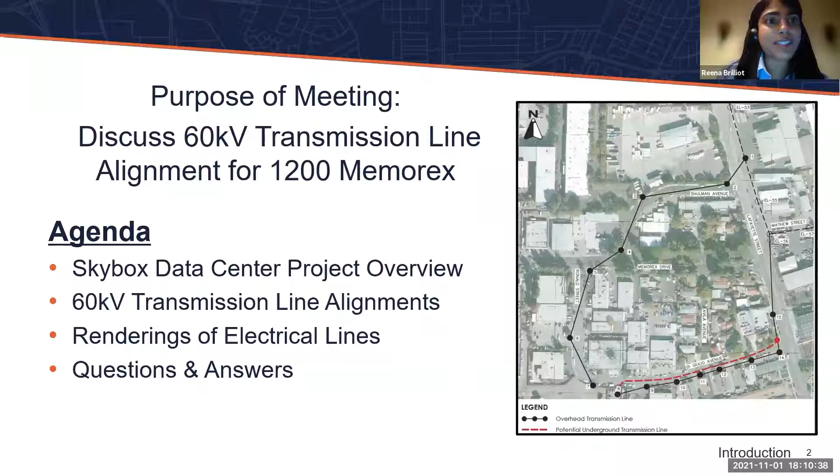So I'm going to hand over this next part of the presentation to Rob Morris, who's the Chief Executive Officer for Skybox. He's going to be presenting the project and providing that really for everyone as context for what we're going to be talking about, which is the transmission line extension options. So Rob, if you are able to speak, we will move the slides over for you.

Great. Thank you, Reena. Good evening. My name is Rob Morris, and as Reena said, I'm the CEO of Skybox, which is redeveloping the former Memorex manufacturing campus and headquarters at 1200 to 1310 Memorex Drive.

This facility is on 9 acres and consists of 472,000 square feet of data center, as well as 87,520 square feet of Class A office space. As Reena discussed, this project does require a new 60 kV service from Silicon Valley Power. Joseph, would you mind advancing to the next slide?

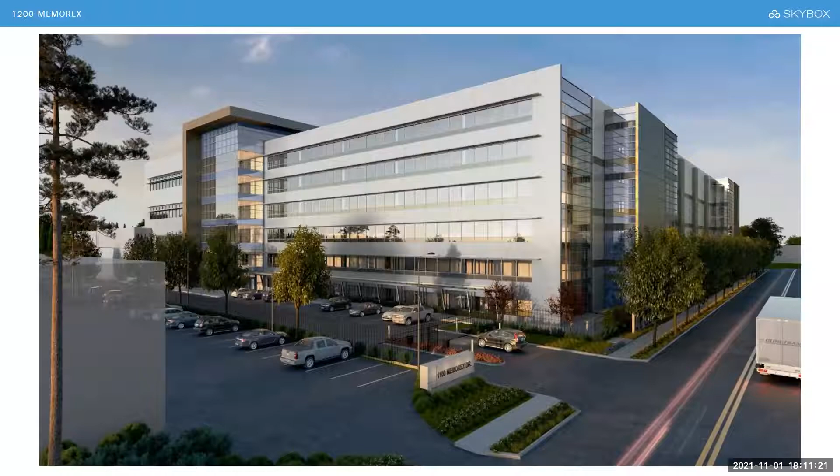Great. And you can actually, so there's the site plan there. You can see the layout. Joseph, would you mind going to the next one?

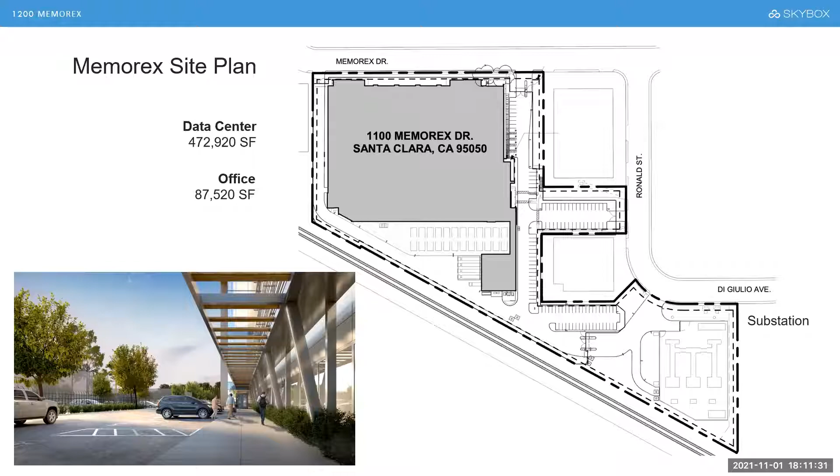We have been working with Silicon Valley Power and the City of Santa Clara staff over the last 3.5 years to carefully design the redevelopment of this existing industrial complex into a beautiful new office and data center that will be a great addition and architectural enhancement to the city. Our company has a long history of building and operating within industrial districts and adjacent to residential areas. Our office and data center buildings bring incredible improvements to community safety compared to its current industrial users.

This campus will be staffed with 24/7 security, watching day and night, and also providing dramatic reduction in existing traffic and parking requirements for the existing industrial uses. We are proud to be great neighbors in each and every one of the communities we serve, and we look forward to continuing that tradition and company culture here in Santa Clara.

With that, I would like to pass the presentation to Alan Corritore with Silicon Valley Power to discuss the considerations for electrical services this evening.

Hi, this is Alan Corritore with Silicon Valley Power. I'm going to talk to you about how we're going to provide service to this property, and go into a little detail about the alignment. I'll give you some options on what we looked at in terms of the overhead alignment and a partial underground option, show you some visual site renderings of the different alignments, and then the city staff recommendation specific to the transmission line.

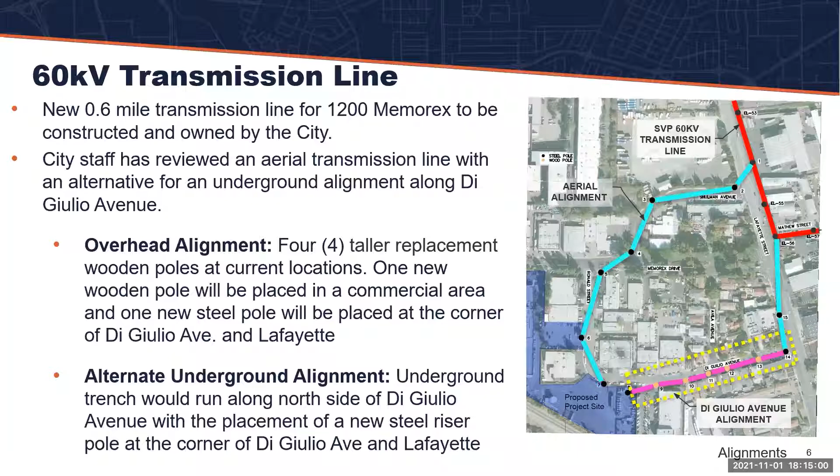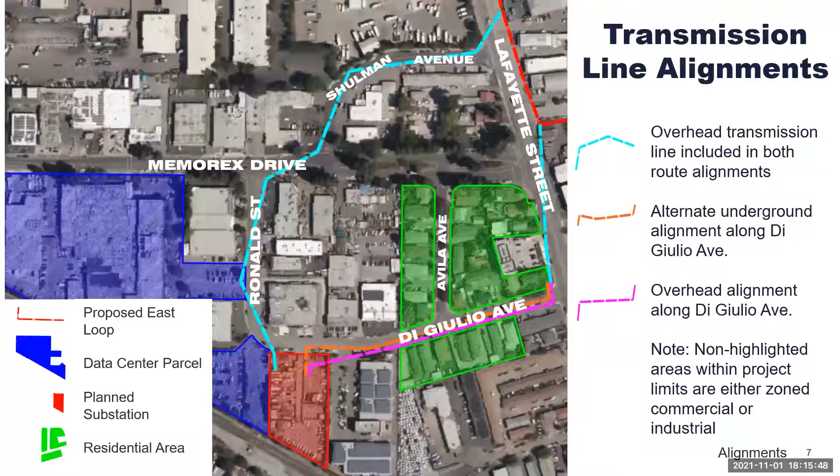I did want to highlight the residential areas within this alignment, where we looked at the overhead option and also the underground option, strictly on Di Giulio Avenue. The other parts and parcels here are either commercial or industrial uses.

So let me talk a little bit about the overhead alignment. The replacement wood poles would change in height from the existing locations from about 38 feet to about 20 feet higher, 57 feet in height. The pole diameters of the wooden poles would also increase. Typically they're out there at 12 inches, and we would see these poles increasing to 18 to 21 inches in diameter. All the existing distribution and communication lines currently on the pole would be transferred to the new poles, and no new easements would be required on the residential properties.

As we are looking to do this alignment to serve the development, the aerial alignment here doesn't require any additional easements. The construction of an overhead alignment is pretty straightforward, about 6 to 8 weeks over a 4-month period of time.

The question comes up, why over 4 months? Typically a new pole installation would be installed adjacent to or right in the same location as the current pole, and that takes about 3 days, with some localized parking impacts associated with that installation. So you would go down the street and every 3 days put in a new pole, and then later come and put in the wires, either replacement or new. Then the communication companies and others, what we call pole attachers, would come and relocate their lines to the new poles.

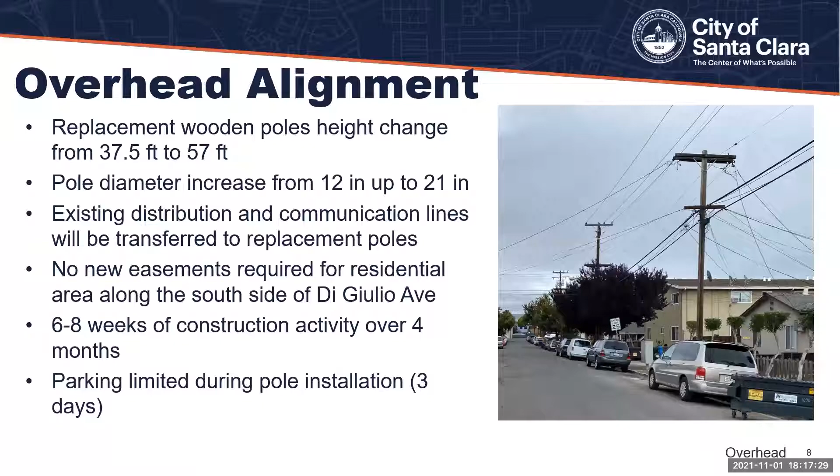So this is truly an aerial view, looking easterly on Di Giulio. I'm going to work from my right to left on this slide.

On the right-hand side would be the steel pole, about 4 feet in diameter, 65 maybe 70 feet tall, transitioning to wood poles as it goes easterly down Di Giulio. The one new commercial pole is nearest to the site, and then we would have 4 sequenced wood poles that would replace the existing poles that are already there.

As we go further down the street on the corner of Di Giulio and Lafayette, there would be a new steel pole on that commercial property, and then the alignment of the transmission line goes northerly on Lafayette.

I'll give you some more information on the coloring so it gives you some idea what's going on here. The yellow would be what we call the 60 kV lines, the new services on the taller sections of the new poles. The light blue or cyan colors are the existing electrical services currently on those poles. So that gives you a real good view of what that would look like. These are again on the existing alignment of the distribution system.

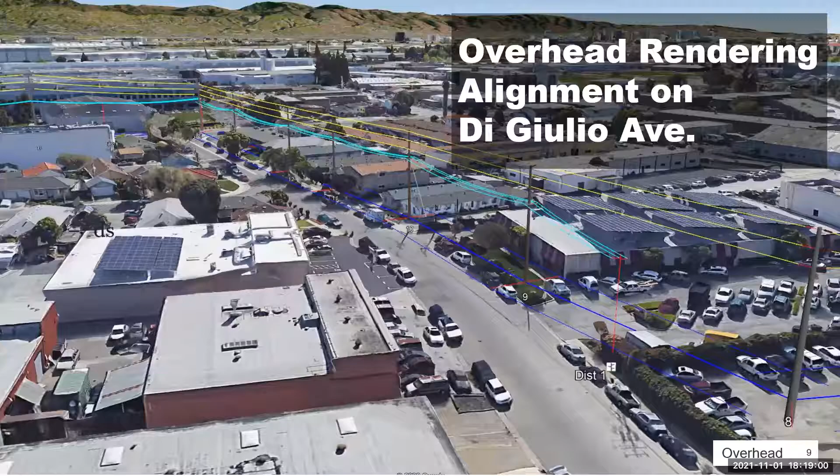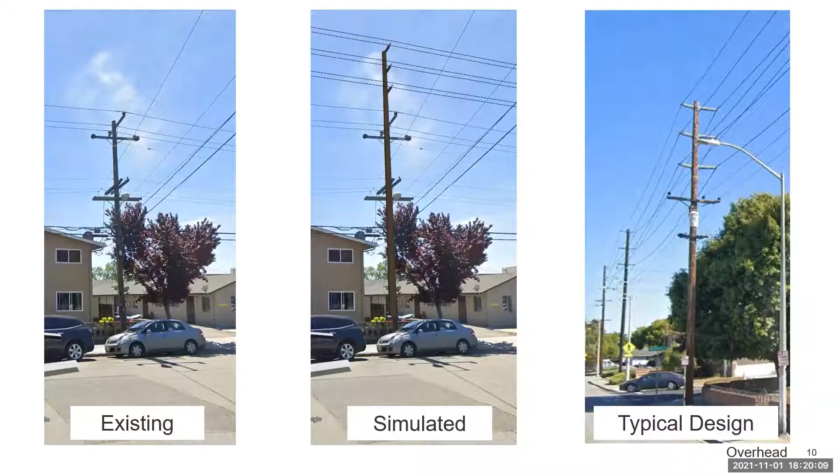So I'm going to go into some detail about the underground option. The transmission line, we looked on the north side of Di Giulio Avenue. This is a little bit difficult to read, but I think it's important that we go through it.

So in the street right of way, there's a lot of buried facilities, everything from storm drain that takes away runoff when we have wet weather events like we recently had. There's almost a 58-inch, 5-foot storm drain underground. We have our sanitary sewer lines that collect the wastewater from the businesses and residents. We have the potable water lines in the street right of way that provide potable water for domestic use, for irrigation, and for hydrants for fire protection. And those are all city facilities.

We also have other facilities in the public right of way. We have telecommunication lines that need to be buried, fiber optics, and then PG&E has its gas line also in the right of way.

Just looking at the map, as you know, that street is only 2 lanes with parking on both sides. It's a difficult street to work on. There's a lot of utility conflicts, and there will also be some significant water and gas service interruptions. So we, as staff, spent a considerable amount of time working with the consultants and looking at all these options.

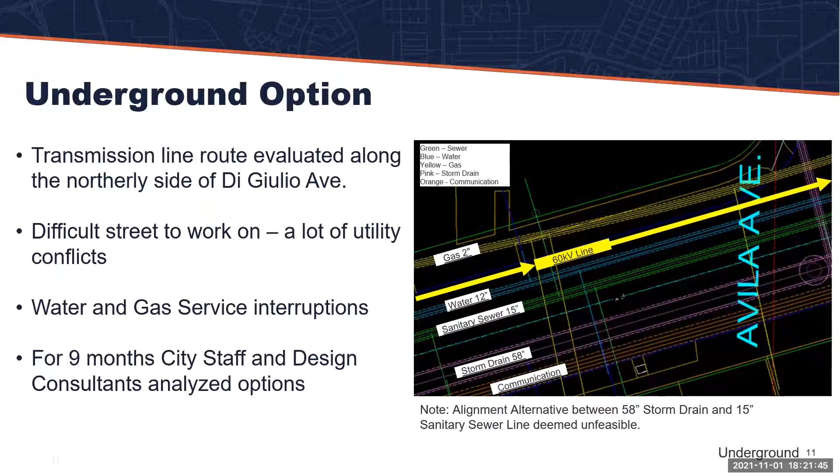Next slide. So this is what we call a cross section. Not only do we look at it at the bird's eye level, but also subsurface and underground.

As we're looking at alternatives to put this proposed duct bank underground, it would require the relocation of the existing water main that serves the properties. What that would entail is we would have to relocate the existing water main, provide temporary services through hydrants and others above ground to residents over a significant period of time. This is not what we would normally do under such longer periods of time. After the proposed duct bank would be installed, a new water main would be placed above the existing duct bank, closer to the edge of curb. So this is a significant operational issue during construction.

I also wanted to note that the city has minimum spacing requirements, standard spacing to maintain separation of utilities. So if there was an incident or issue that needed to be repaired, a sanitary sewer main or a water main that may have burst, we'd like to keep those standards of 5 feet between these utilities so we do not have issues of one utility impacting another. I did want to mention the gas main is under the sidewalk. So this is a typical cross-section of some of the considerations that we need to take a look at.

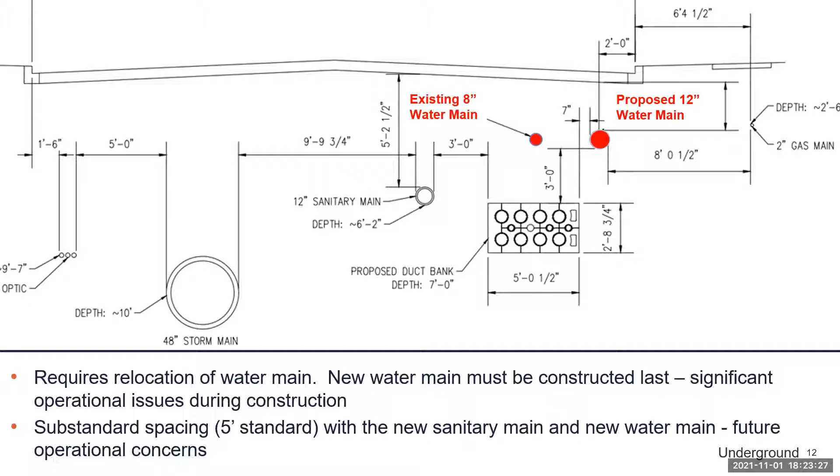Next slide. So here's some additional details. I think a picture speaks a thousand words. On the right, you'll see exactly what type of construction we did underground for a mission transmission extension project. This was done about 2012, almost 10 years ago. So this is the size and scope of what that type of work would look like. You can see it's very significant shoring, a very deep installation. It's a heavy construction project.

But let me go into some additional details on the water line. Again, we'd have to remove the water line, and the above ground surface work would be necessary. What we call temporary dead end water mains would be installed, so that would have to be flushed to maintain good water quality. The construction timeline would be extensive, about 12 months in duration. Since the water main would be out of service, fire hydrants and fire services would be suspended, so a 24/7 fire watch could be required. I wanted to point that out.

The other issue for the community would be access during construction. When they're working in a large trench like this, there would be really no vehicular access during construction, and no on-street parking during those stages of construction. At the end of the night, it's hard to see in this picture, but they would put steel plates to cover the trench itself so folks could have access. But again, I wanted to show you what this looks like.

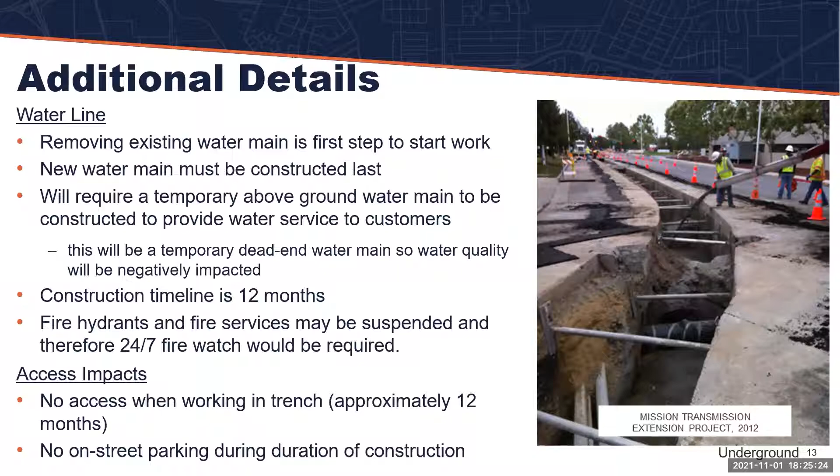Next slide. So when we look at this underground option, it's only partially underground - it would go aerial as it reaches Lafayette. One of the requirements, even for the underground option, is what we call a steel riser pole. It's required to transition from underground and bring all those conduits, 8 conduits, up to the structure. On the right-hand side, you can see the location on Lafayette, in the northwest corner of Lafayette and Di Giulio. It is a very large structure, approximately 85 to 90 feet tall. The pole would require an 8-foot diameter concrete foundation and a steel structure on top. I wanted to show that even in the underground alignment alternative.

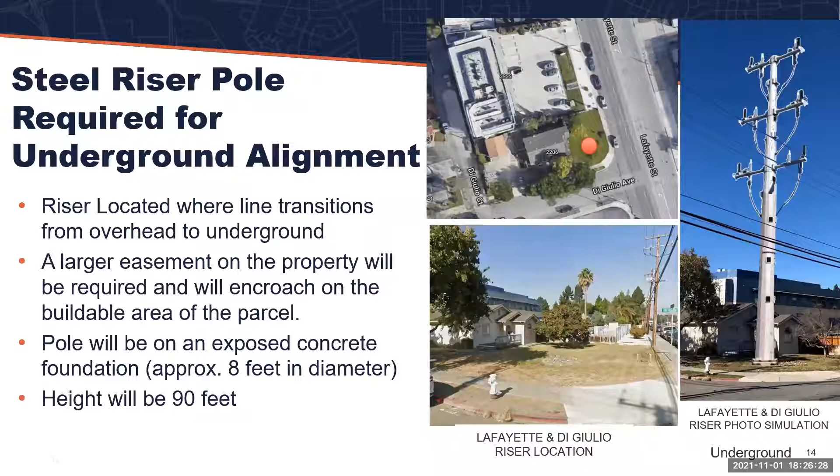Next slide. So in summary, when staff looked at the impacts over time, we wanted to highlight our summary recommendation. On an overhead alignment, we're being very consistent with our city residential design standards. The construction activity is a much shorter time frame, much less inconvenience to the community, continues to allow residential parking, and no additional poles in residential areas on this overhead alignment. We were using taller wooden poles to replace the existing distribution poles, and we are using wooden poles in residential areas. For other industrial areas along this alignment, we would be proposing steel poles, which is much more consistent with that construction.

I want to provide some bullet points on the alternative underground alignment. Even if we went to that underground alignment, the existing distribution poles would remain. There would be a much longer period of time for trenching, 9 months, followed by pavement restoration. There would be extended restriction on residential street parking along Di Giulio Avenue and Di Giulio Court, just to get vehicles in and out of that area, plus the water service interruption as I detailed, and restricted street access during construction. I did want to mention the larger riser pole on Lafayette and Di Giulio Avenue.

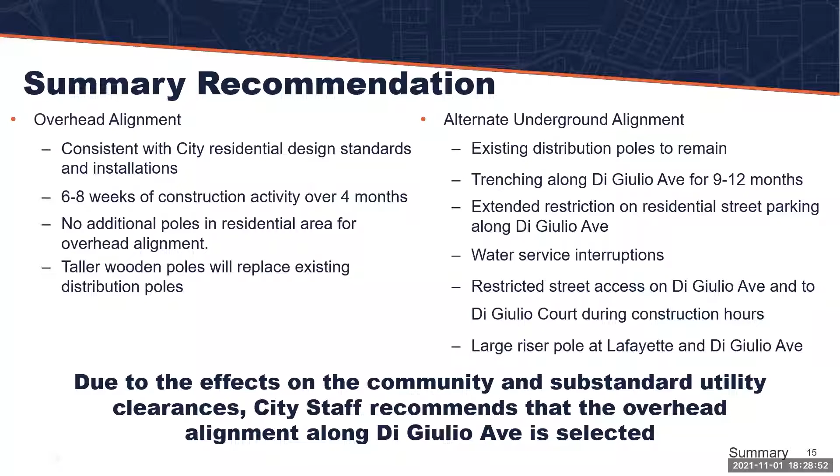Thank you, Alan. Some folks joined our meeting a couple of minutes after we started, so I wanted everyone to have context for today's meeting. There is a development proposal that the city is considering, and that entire project is something we're happy to talk about, but we want to stay focused tonight specifically on the extension of the transmission lines. My contact information is on this slide for anyone who would like to talk about the project, architecture, environmental analysis, or anything related to those issues. Please contact me, and I'd be happy to set up time this week to discuss those with you.

Coming back to our topic for tonight and the presentation you heard, we have a fair number of attendees here tonight. I can see 18 attendees, and I'm opening this up for questions to anyone participating in the webinar. You need to raise your hand and we'll call on you if you have questions about the presentation, or if you want to provide feedback on the two alternatives as well as the staff recommendation for the transmission line extension options. So are there any questions that people have?